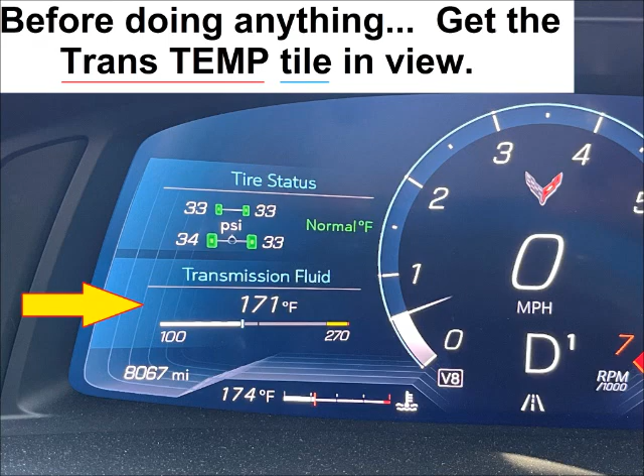So GM says you don't need the grill guards if you're going racing, aggressive driving, and in hot weather. You can install them for regular use, tame driving, and the weather is okay. Here's some ground rules if you want to add the grill guards: get your baseline temperatures under your driving conditions of your DCT fluid, install the guards and then verify the temperatures, compare your new temperatures to your baseline, see if they've changed, and repeat if the weather is hotter or if anything is changed.

Next up is grill guard vendors and install tips.

The very best vendor is supposedly Scrape Armor. They are GM approved, OEM fitment, so the fitment should be perfect, dead on. They will allow a lot more airflow than any other brand. Scrape Armor is also used by Ron Fellows Performance Driving School, so these are track tested and very good for your car, although they are the most expensive at about $400.

Second up, for the top two best, Paragon Performance, very high quality as well. You might have to bend it a little bit and play with these to get them to fit just right. Even though they say they're OEM fitment, you might have to tweak them. They come in just under $300.

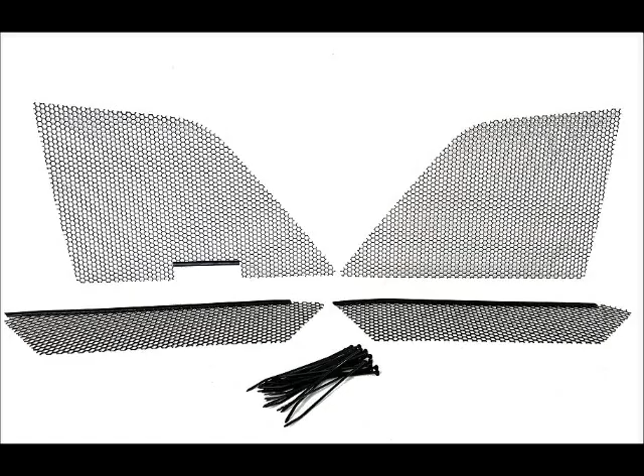There are several vendors that just produce or sell the wire mesh, and these are apparently pretty decent. I do not know the reality of them, but for many people these would be perfectly fine. But if you're going to be aggressive in hot conditions, anything like that, you really might want to sink your money into higher quality front grill guards.

Installation tips. The very first thing I found out was if they tell you it takes 30 minutes, it might, if you're prepared or experienced with working on cars. But that 30 minutes may actually be about an hour.

Very important, the fins on the condensers are extremely delicate. One Corvette forum described them as being like tinfoil. Another very good tip is you might try to squeeze in, very delicately, some cardboard in front of the condensers, so while you are installing either the wire mesh or these other grill guards, you do not knock your hand up against those condenser fins.

You've probably seen out on the forums where people have gotten little dental tools, or maybe a really small flathead screwdriver, to fix the fins of the condenser. So there's an idea there as well.

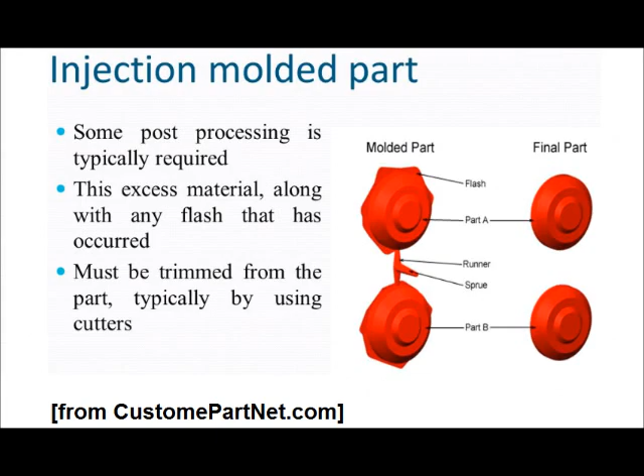If you buy plastic grill guards, look for sprues, little spikes on the back of the grill guards, and be sure to trim those off.

If your grill guards require zip ties, buy or get a hold of a few large zip ties that you can really manhandle and use those to get the grill guard mesh on initially, kind of loosely. Then you can use the smaller zip ties that are hard to see, get those applied and looking nice, and then get rid of the bigger zip ties you used to hold everything in place initially.

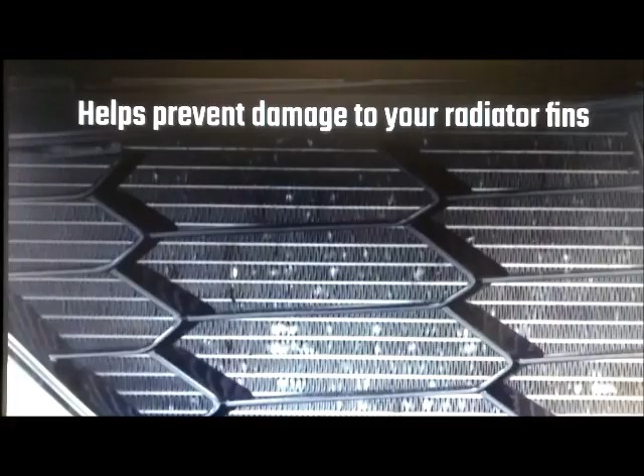And as I alluded to earlier, the Paragon Performance grill guards may need some bending and dry test fitment first. So play with those, look at them before you think you're just going to haul off and install them first time. Both Paragon and most likely Scrape Armor as well take a little bit more time and patience than anything else, so just keep that in mind.

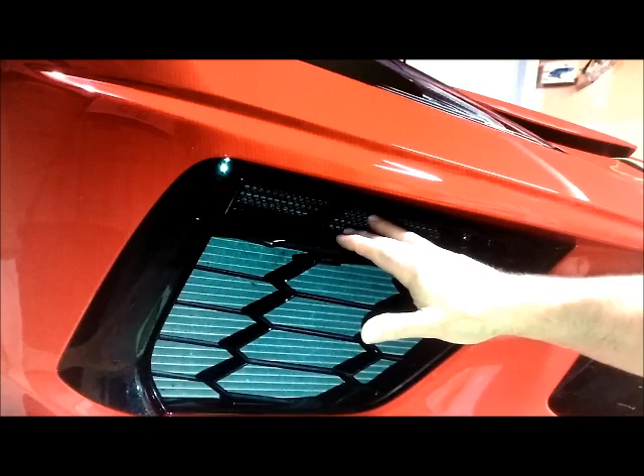One company that I left off the list by accident is C8 Vet Parts. They have grill guards as well, still fairly expensive, like $350, but they basically tape in - they have little glue pads, and you get these in place. They fit very, very well. To me, these are going to be the number one easiest grill guards to install ever. But they are glue padded onto the front face of the existing grills.

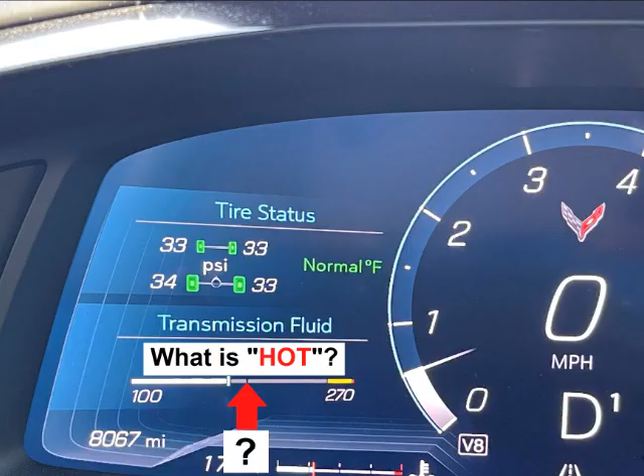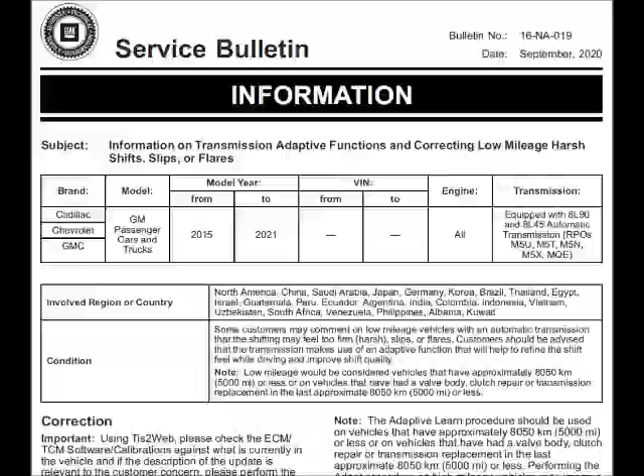I would really like to know when the C8 thinks that the DCT is overheating. So after installing the grill guards, knowing this temperature, I can better predict whether or not the grill guards are going to contribute to the C8 overheating. In this GM service bulletin, relative to things like the adaptive learning procedure and work on the transmission, it shows a high temperature of 203 Fahrenheit as being within the optimal range for that transmission fluid.

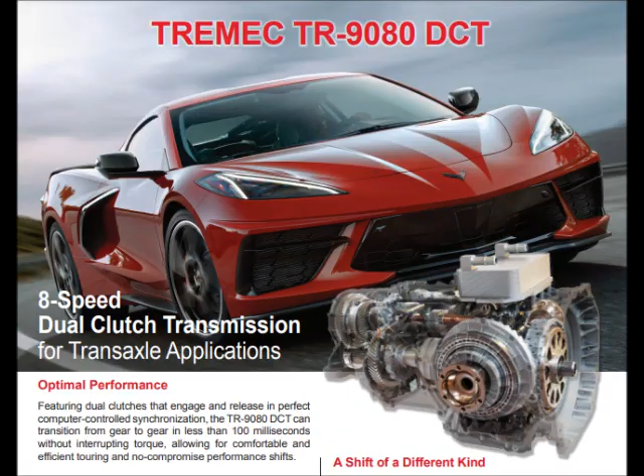Now, when I asked some of the muscle car shops, 21st Century Muscle Cars replied back to me saying that they would hope the temperature would not exceed 200 degrees. So researching Tremec, the people that made the DCT, I went through PDFs and all kinds of stuff, and finally, under some questions and answers, I found one item that said the fluid should not exceed 250 degrees Fahrenheit, otherwise you need to change it.

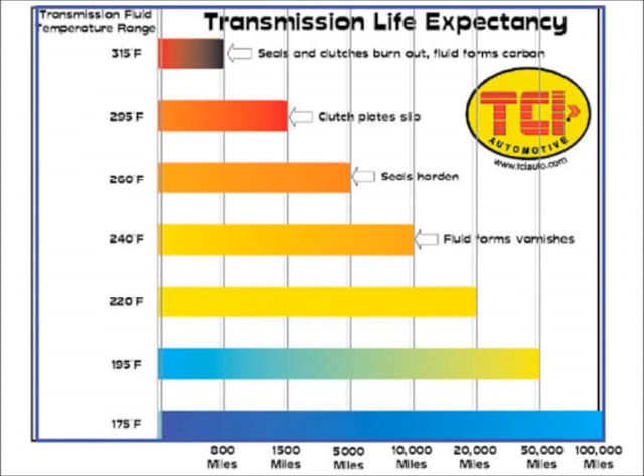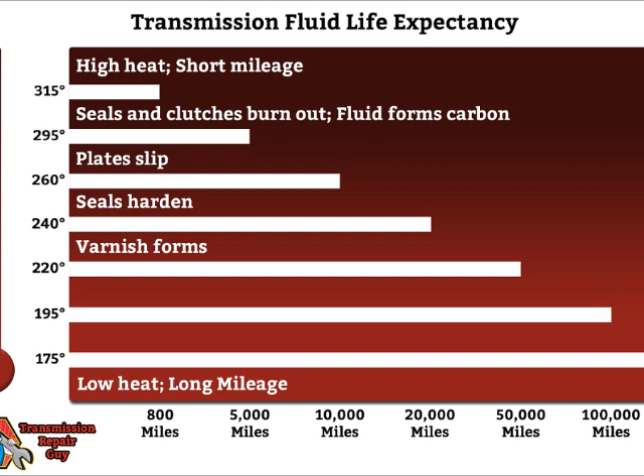Here are 3 charts that I found that also give this basic information, that the max temperature is somewhere between 200 and 225. Really, the ceiling is probably actually 225 to 250. Although the max limit for the DCT fluid temperature is probably between 220 and 250, you probably want to do like what 21st Century Muscle Cars said, which was not let it exceed probably about 200.

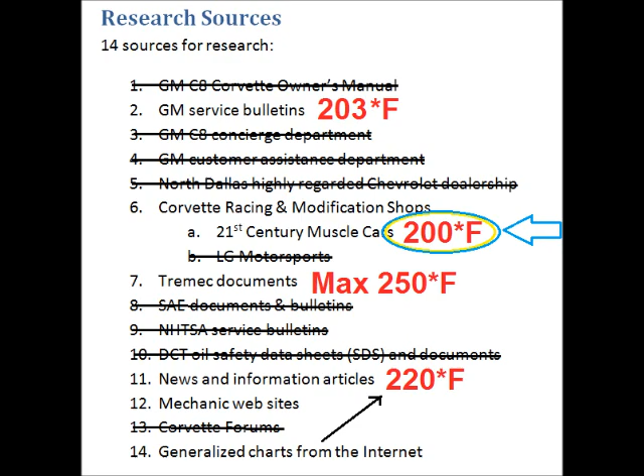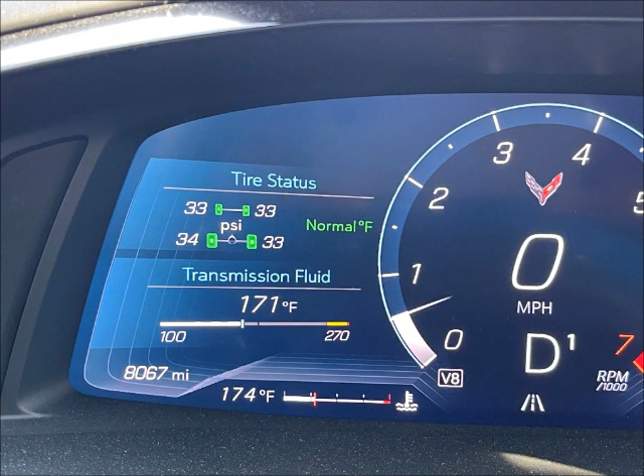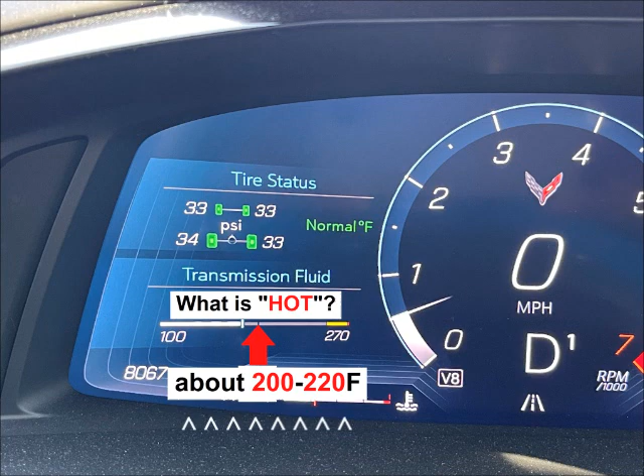In summary, you do not want front grill guards to increase the temperature of your DCT fluid. So if you do install them, now you know you can watch that tile, see what your temperatures are running, and watch out for that 200 to 220 degrees so that you know to protect yourself ahead of time, without the car going into overheat mode and scaring you to death.